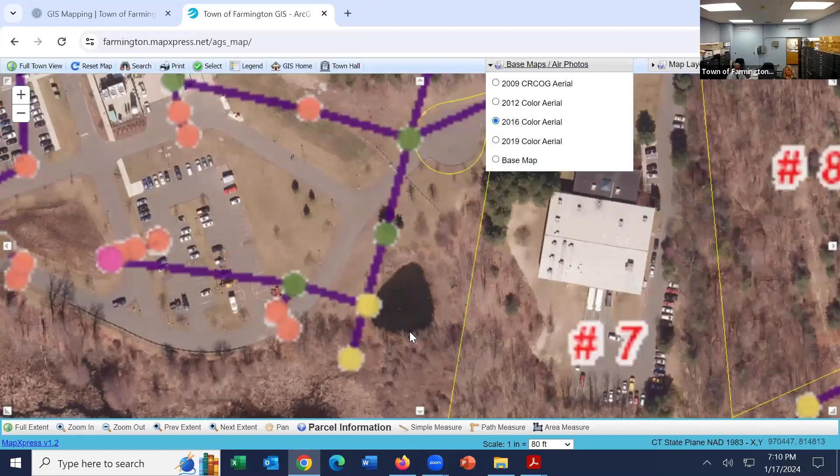So here's an example. This was 2015, and this is 2023. And then I actually got another video. This is from 2016, our aerial mapping we have from 2016, and you can see how wide open it was when it was first originally built.

Unfortunately it's gotten to a point now where it is pretty well vegetated over. So I've got some photos here as well. You can see in here there's a lot of debris down along the edge, right along here, all the way around. There's the pipe inlet coming in.

Now we have had a lot of water, as you know, a lot of rain and runoff. However, you can see there is an area of heavy silt, I think, at the bottom of this pond. So I think what's needed is

they're going to need to clear out a lot of this invasive vegetation along the slope so they can get in there, clean around these openings. And then, again, they're not going to do it right now, but when this water is down, go in there and excavate a lot of this sediment out and haul it off site.

At one point it looks like this was designed as a retention basin. I think it was assumed that with all of the sand on this site, this water would infiltrate pretty easily. So we're thinking that either one, the groundwater has snuck up here, or two, that this sediment is acting as an impermeable liner where the water will not infiltrate out.

As part of that, right over here there's a spillway, and with all this heavy rain, with all this water that's ponding in here, the volume has been reduced and it spilled over and eroded the outlet of the spillway a little bit, right around here. So what they want to do is just put some new riprap stone and repair that.

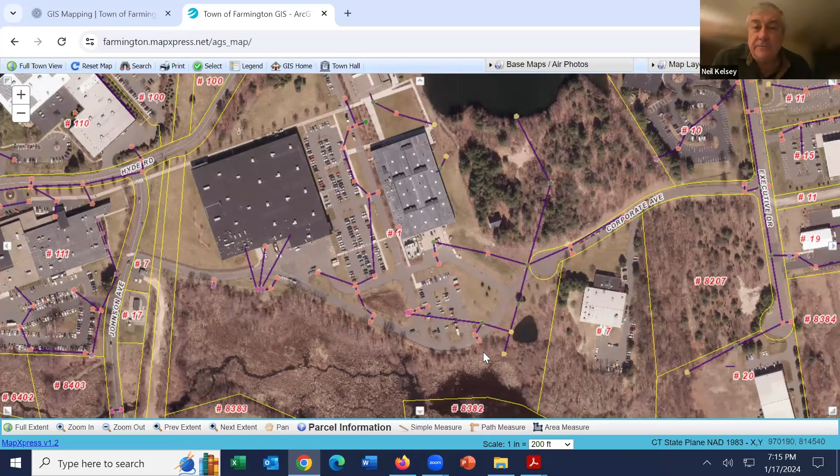Does anyone else have any questions? The only question is from Mark Simpson. When do they, I know you said in your Friday notes that we should do this in the driest part of the year. Did they give you any indication that they have a specific time to do this or not?

No, as we had talked, we had met right before Christmas time. We got together with them and said, yeah, all right, the rain is done, right? We're gonna slow down now. So of course we had the snow and then we had 3 inches of rain with 3 inches of snow melt, so we're back up to where we were before. We're just gonna work together and let them know when a good time is to get in there. If it actually dries up a little bit next month when it's cold, they may want to go in there and try to work on it when it's a little more firm, rather than wait until late spring when it's all wet and they're trying to lose the machines in there. So it's gonna be a play it by ear situation.

That's what I was alluding to, I was wondering just like what we had the other day, how much people had flooding, at least in my neighborhood. I heard about a lot of flooding in the Millwood section, and if they would have the same scenario towards late spring, if there's snow pack and then there's rain, what type of problems would it be? So I didn't know if there was something you'd want to do sooner versus later. I'm not saying one or the other, but it's all about getting the job done and done right.

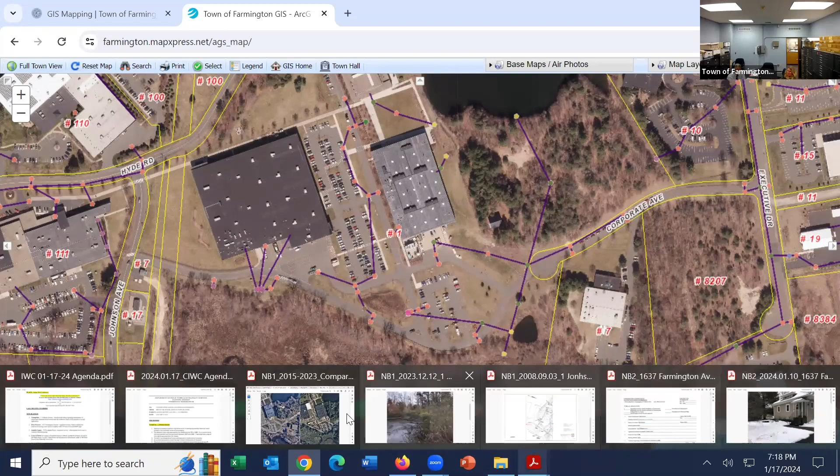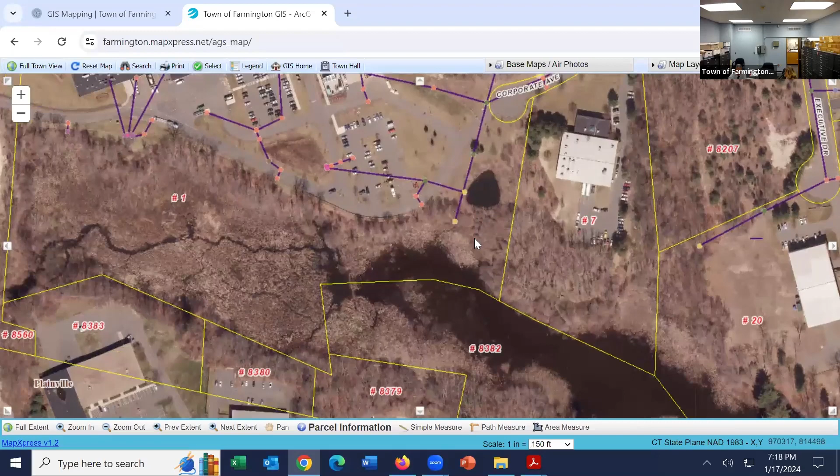When I came back I took my pictures, but the picture for the spillway didn't come through. It's just a little riprap spillway - it goes up and spills over down the edge. When you come into here, it flows directly into the Pequabuck down in here, comes down through here, meanders in and flows out, then takes the turn and heads right up underneath Route 6 that way.

So I take it that in doing the maintenance, there wouldn't be any discharge from the pond. No, there would be no discharge. The only thing we'd have to work with them on is whether at some point we need to pump the water down and get it out of the pond. If it's not going to infiltrate, then it's never going to infiltrate. Then I'd work with them, making sure it's clean, and we just pump it out over the edge down the spillway, and address it. Then let whatever amount of water's left dry up, and then go in there and start to excavate it.

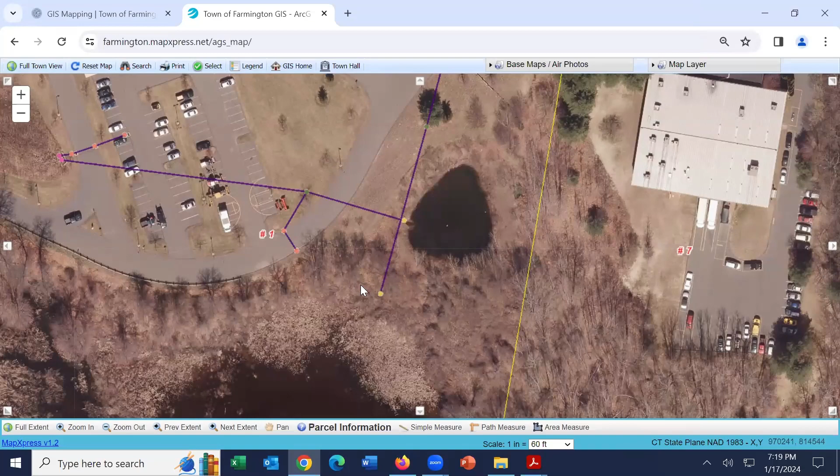Okay, this is Dave. I did have a question too about the stormwater system in general. It seems the inlet from this pond is connected to the outlet to this other pond over to the north. This one, yes, it's connected right here.

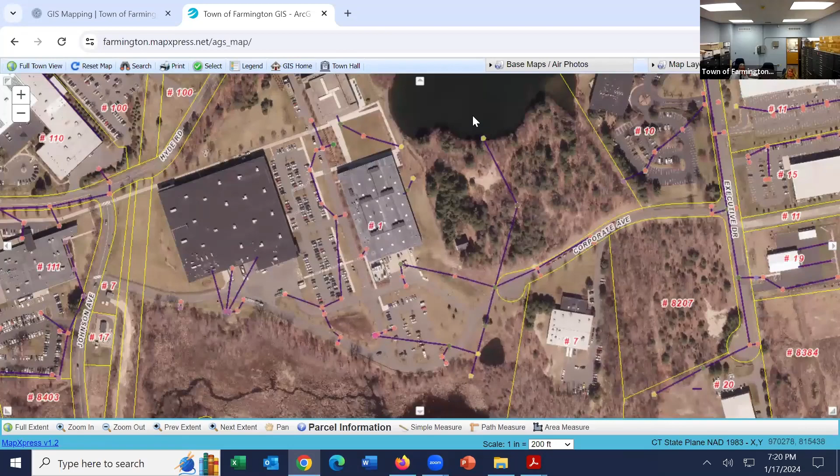What happens is some of the site, you've got different outlets throughout here. So this portion runs out here - the parking lot - and this portion comes in, runs into the pond, and then flows out this way and goes underneath. This is a large outlet from the existing pond on the property, so this water flows this way right out. And what happens is that bypasses the detention pond we're talking about - yes, that does. Then this pipe comes in, sneaks underneath that pipe, or over it, and then just pops right into the pond.

Okay, I just wanted to get clear where things are going. Thank you.

Okay, does anybody have any additional questions or thoughts about how you'd like to handle this?

This is Dave. It does seem like it's almost the definition of maintenance. This is Mark, I agree with that statement. Yeah, this is Rich, I agree too that it lends itself to the maintenance definition. Yeah, this is Neil, I agree.

I'd also maybe suggest to them that they come up with a routine maintenance plan. I don't know what that would look like or how often it should be done, but just to prevent a major clearing or cleaning at some point down the road. And just so everyone knows, that's going to be under section 4.A of the regulations.

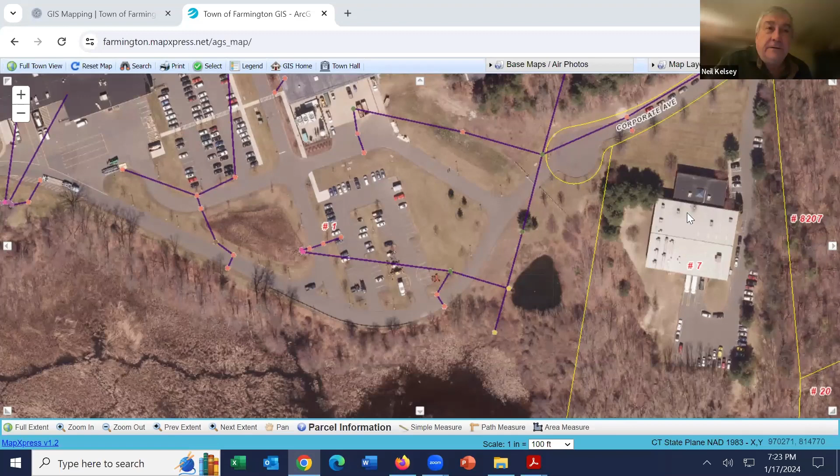Yeah, use this as a rationale to get them to do something similar as if it was a new application. Exactly, get them on the same page. I'll definitely discuss that with them, they need to look.

So would somebody like to make a motion that we would handle this under section 4A as a maintenance activity? Dave will make that motion, and Mark will second.

I would say let the town have the flexibility to determine when this work is being done, if there's an optimal time, say as Bruce is saying, like February, then that's fine. Otherwise it's another time of year that's more beneficial. So I would have the town staff make that determination with the client. And I would suggest that any applicable sedimentation and erosion controls that might be needed would be used.

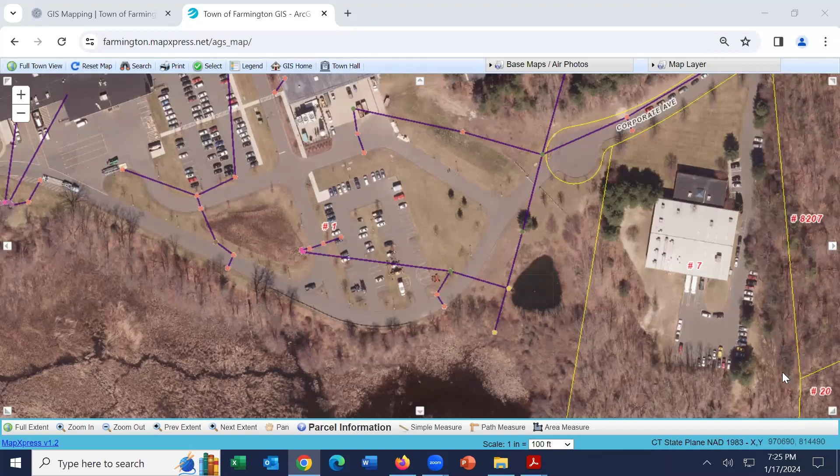Just to get into pumping that thing out. Exactly, okay. Sounds like a plan. All those in favor? Aye, aye. All those opposed? Abstentions? I guess we're good. All right, thank you.

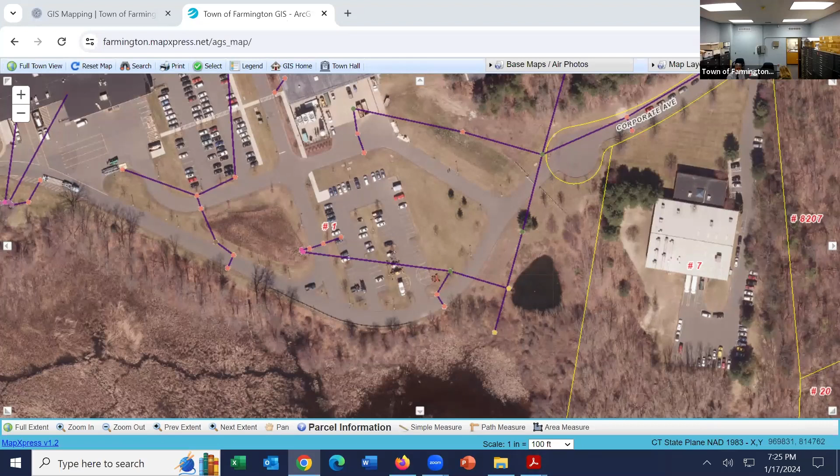Second application is for 1637 Farmington Avenue. Owner is Peter Petrossi. He also has his contractor on board. So let me just do a couple things here, let me switch over to that application, and we could then bring Peter in.

Are you on, Peter? Yes, can you hear me? Yeah, we can hear you. Okay, so I'll start with this little plan view here. If you want to give a quick brief summation of what's going on for the commission, start with your name and we'll go from there.

Peter Petrossi, I'm the owner of 1637 Farmington Avenue. The house was built in 1934. There were no public records until 1948. I did check some deeds that I'm pursuing with my legal team regarding the estate.

Bruce and I can't think of the engineer now, but they were very helpful. Kathy Blonsky wrote a real nice email on my behalf to the state of Connecticut, looking for assistance from them. But bottom line, what I have on my property is a sinkhole, and the sinkhole was directly caused by the culvert, with the excessive rain and probably a number of other factors.

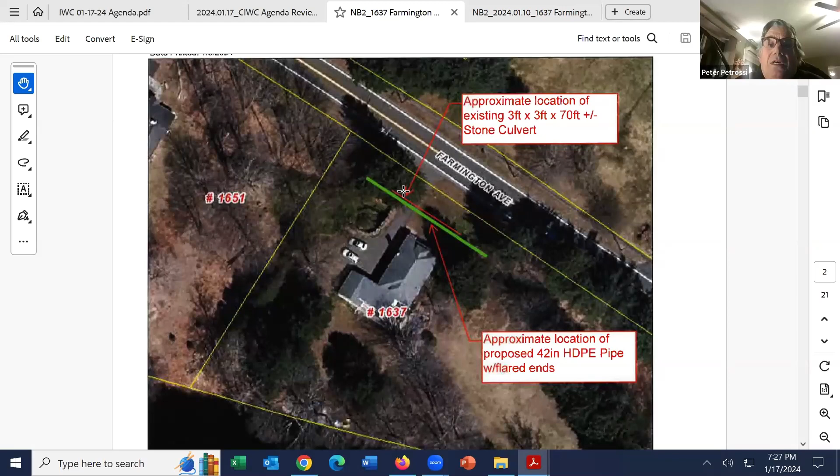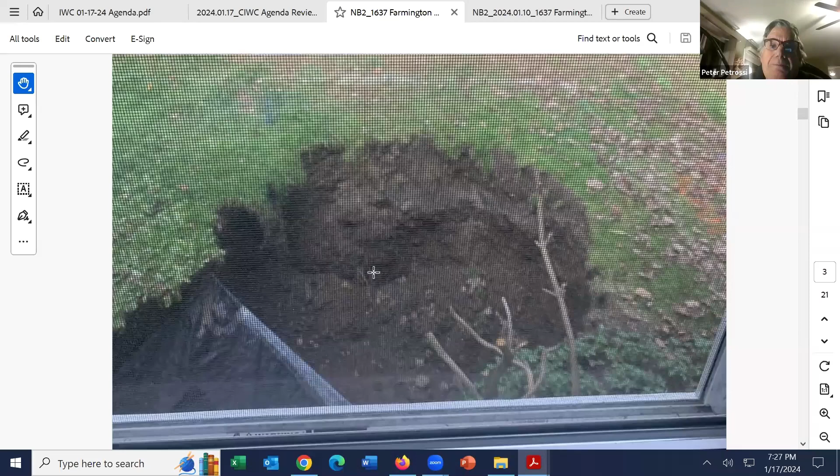So I got estimates, a number of estimates just to fix a small portion of it, because it's a drainage problem. And after further review, I don't think I could sell this property with a Band-Aid approach.

So what I did is I had contract... can everybody hear me okay? No, we can hear you. Yeah. Emerald, okay, if you could... yes, I can hear you too.

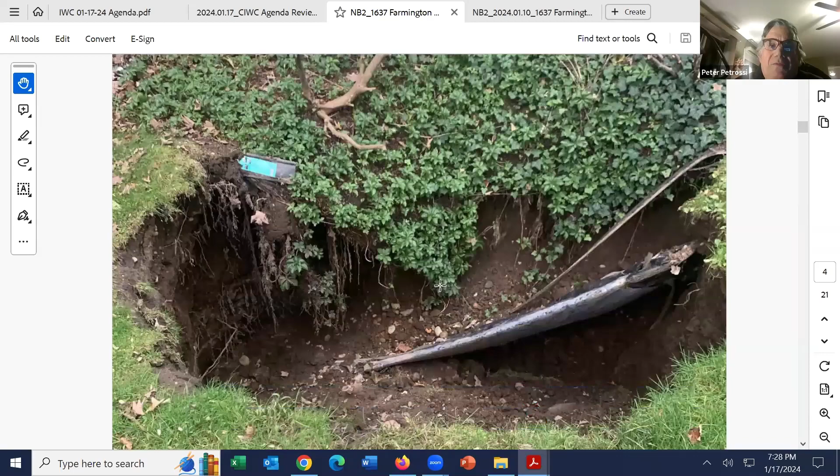So I got a really good group of contractors. I settled with Emerald's group there, and I'm trying to get the sinkhole... I'm looking to repair the culvert from one end to the other and do it right. It's a bit, cost is insurmountable, but I'm looking to do it with double walled ADS pipe, which is what

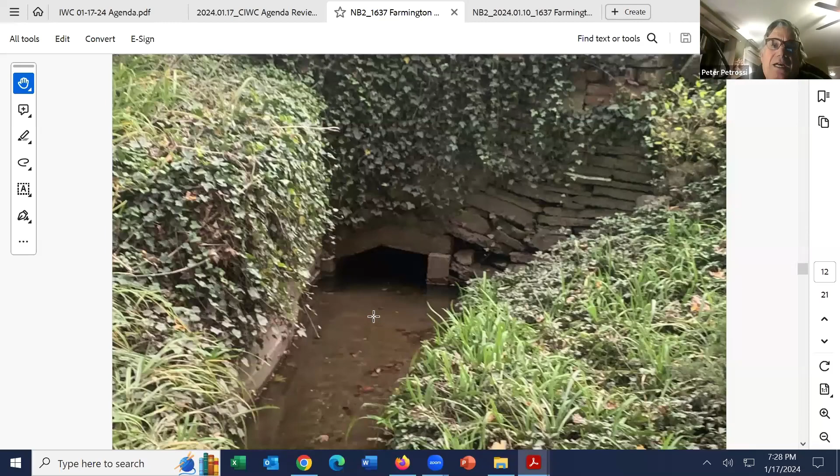all of the contractors that bid it recommended, and the proper backfill, stone compaction. They're going to extend out on both the inlet and outlet and flare down, flared ends I believe is the term. I did a lot of research to educate myself on this, and they really didn't start making culvert pipes till 1987 that are available for this type of application.

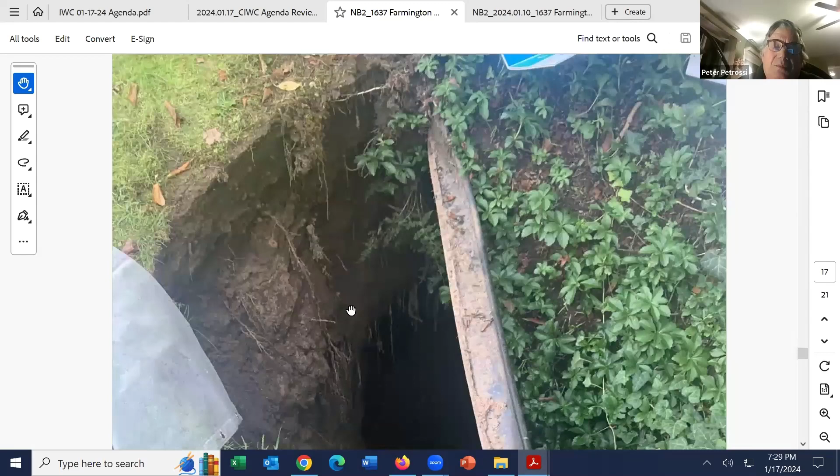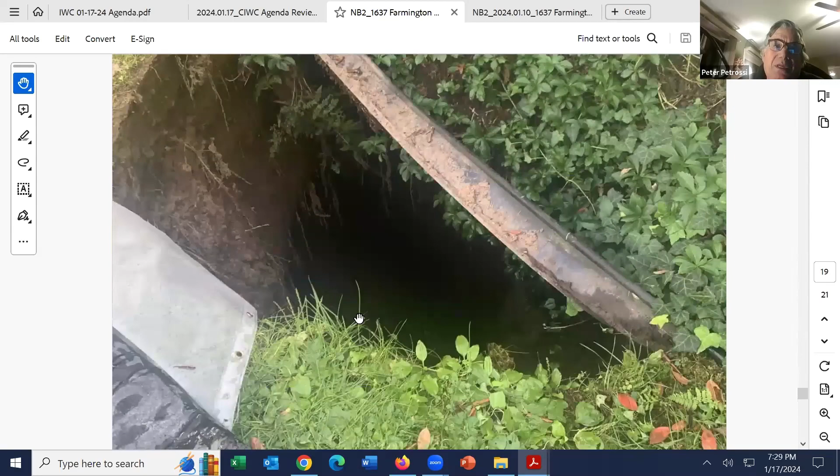So I'm using the best practices. It's very expensive, I still do have issues with the state and I do have legal counsel on that matter. But my approach to this is to do it right. And I got to be honest, I feel like I could almost write a white paper, I put so much time into researching this. With the help of really good contractors, I got a lot of sympathy from people because I'm 68 and I was going to retire. I can't retire now.

So this was some pictures I was trying to scroll through, if you were still seeing any of those of the sinkhole. And more of the sinkhole. This is the actual driveway crossing, and the culvert runs across this way through here. You can see the condition of the culvert inside. It's just all loose stone. It's damage, yeah.

So if I go back to the plan... it's gonna hold on, I gotta get out of this. This is crazy, it's a new... it's not working here, I gotta go. And here we go.

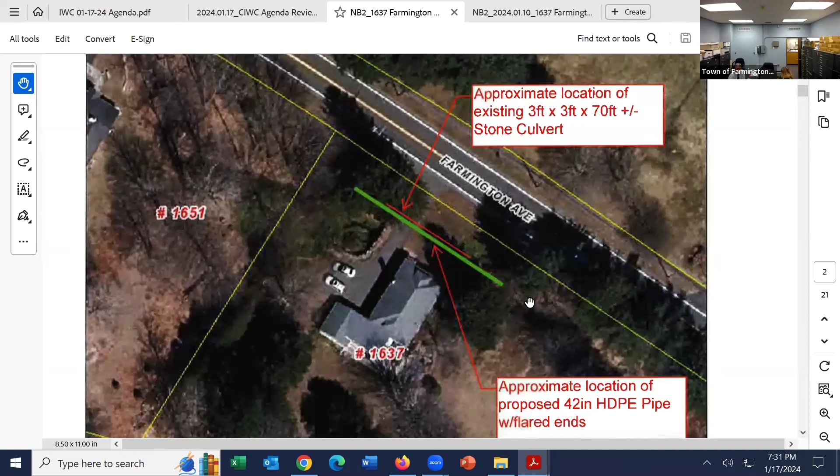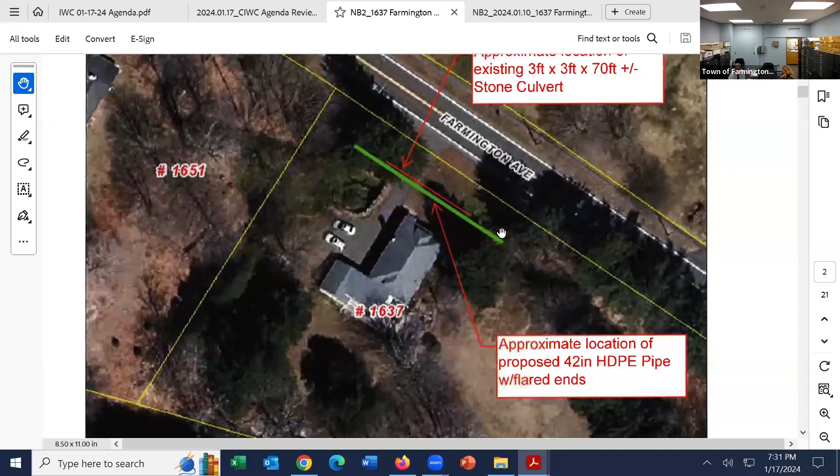So we have a little plan in here. Here's Farmington Avenue, there's the driveway crossing. The red is the existing culvert. And as you remember, there were some head walls in there. So part of the plan, he's proposing to put a new 42-inch pipe across here, and the head walls will go away. Instead of where the head walls end here and here, they're going to now fill and slope the ground down into here, and put flared ends on either side.

I'd like to just make one comment. In my research, when this was built in 1934, there were probably no or very little homes in the area. Since then, across the street, those condos, I walked across the street, they've got a large 4-inch and 2-inch drainage going into the stream. A lot of houses were built, and the state catch basins go about a half a mile up the road to Walnut Court. So there's a lot of water coming from the state side and the neighbors. I'm not happy about it, but it is what it is.

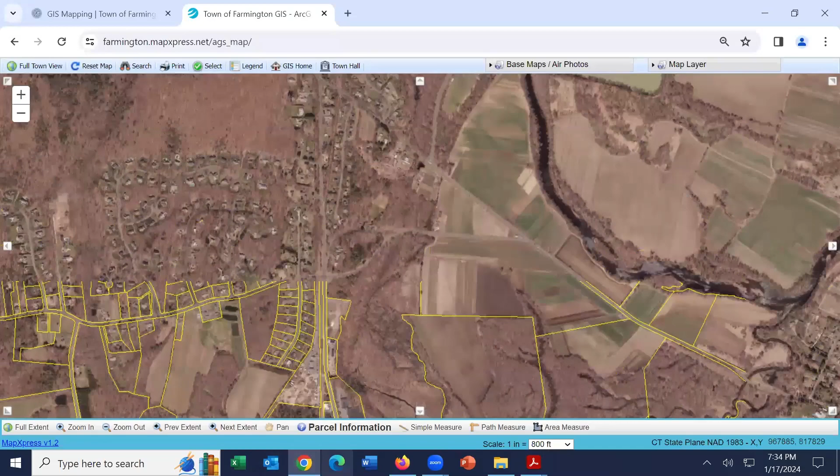I did have a couple of questions. What is the nature of this water course? Is it intermittent, or does it flow pretty much all year long, or is it more tied to storm events? He's asking how often do you have water flowing through there?

It's really a light stream, you could walk up to your ankles in it. Even today, once you get on the outlet side, as it approaches the river, it gets a little deeper. And the reason it backs up, what I've noticed, I've lived here 7 years and I've never had it overflow, even with the heavy rains that we had, where it really came over. Where it comes over is the southern part of the property down near the river. But when the river gets excessively high, it takes a little longer for this water, in my opinion, to migrate out.

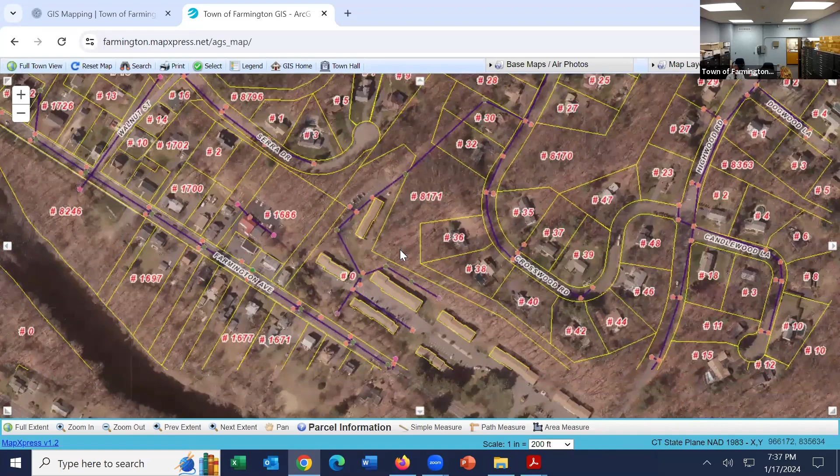You can see this here. Here's the outlet where it comes into the Farmington River. Following it back, here's the culvert crossing, runs up through here. It takes a lot from at least Walnut Court down, dumps into there. Also takes the back of these homes along Farmington Avenue, comes into here. The apartments across the street dump into there too, which also collects water from Crosswood, so road runoff, as well as the entire yards, all pitched down through here. So there is quite a decent size drainage area.

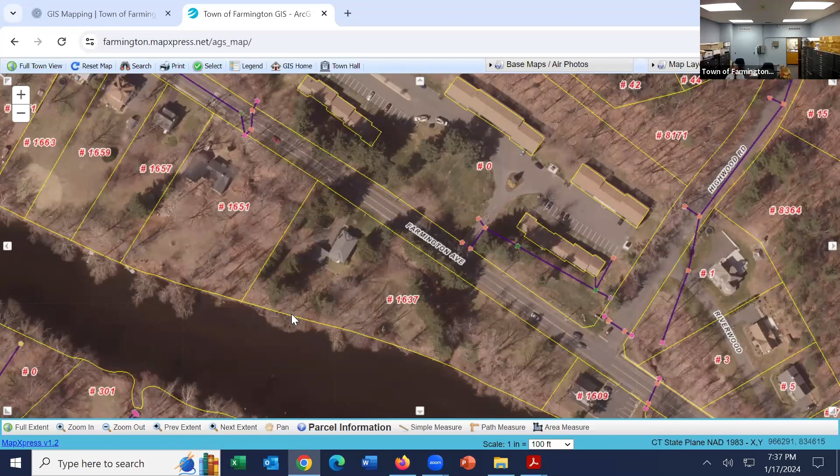So this is pretty much a watercourse for all practical purposes. As Peter said, it's usually... does it ever dry out, Peter? It did, you know, a few years ago when the river was very low and we didn't get any rain. The water was so low it didn't have to move, it just kind of sat, maybe a half an inch or so. Even today it's very low, like that picture Bert showed, it went back to low even with the snow melt, which surprised me.

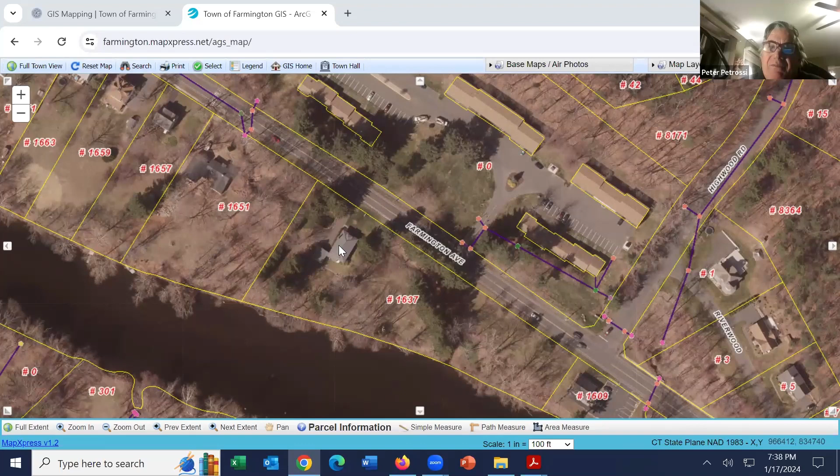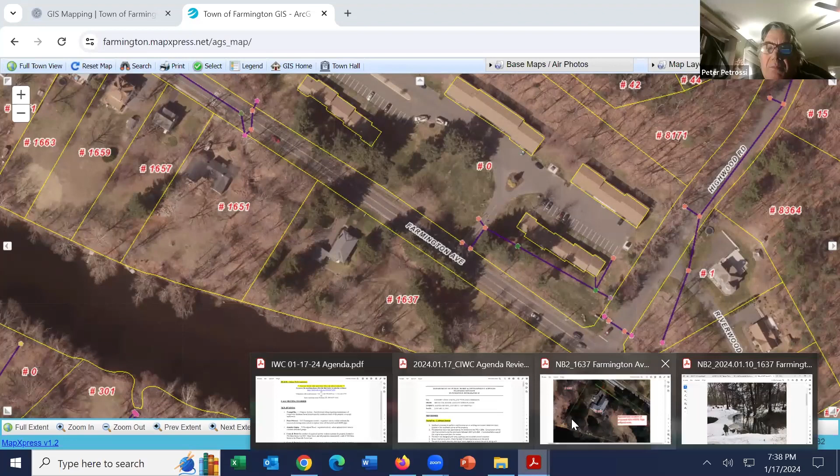And again, I'm using best practices. I am not band-aiding this. I don't even want to mention the cost, but I'll be honest, the high estimate came in at 160,000. For a homeowner to absorb this, at my age, and having the state water here and stuff, I have a lot of questions I'm still pursuing with my legal people. But the town has been extremely cooperative and helpful. I feel blessed to have their support, going to bat for me with my dilemma.

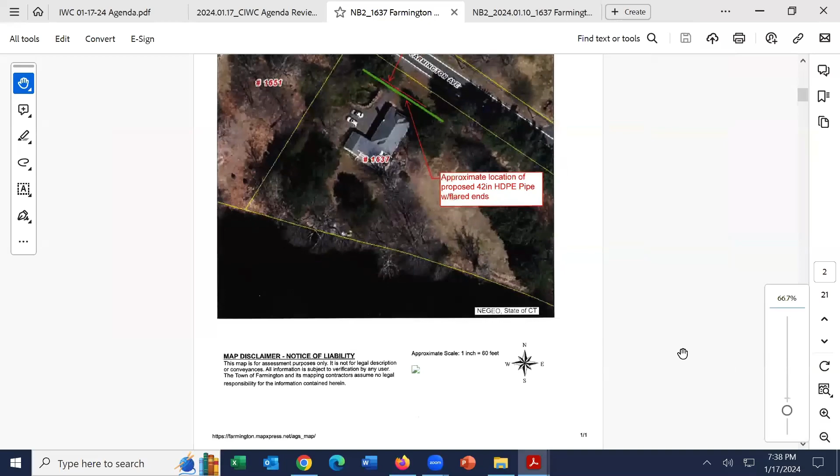I might have a second question. I just wanted to clarify the reason why we're not going with the end walls and extending the pipe, I guess 25 feet in each direction. What was the rationale for that?

Well, the rationale on the extension - and I'll let Emerald comment after - is I had several people bid this, one of them did the project on West Avon Road. Everybody said, based on their experience, to extend it out and slope down with the correct compaction. We're going to go right by ADS, which is the best pipe you can get - I looked into Prinsco, ADS is better. We're installing it with the right bedding, everything. So we are extending it instead of just keeping the end wall inlet and outlet as is. It's going to extend out, somewhere in the area of 120 feet plus or minus.

If you want my contractor to chime in - Emerald, go ahead. If we're gonna extend it like 25 feet, like I mentioned, that slope needs to hold for your driveway and for the holes, it's already there, so we don't have to do it again. And it's gonna be the right materials for compacting, like you said earlier.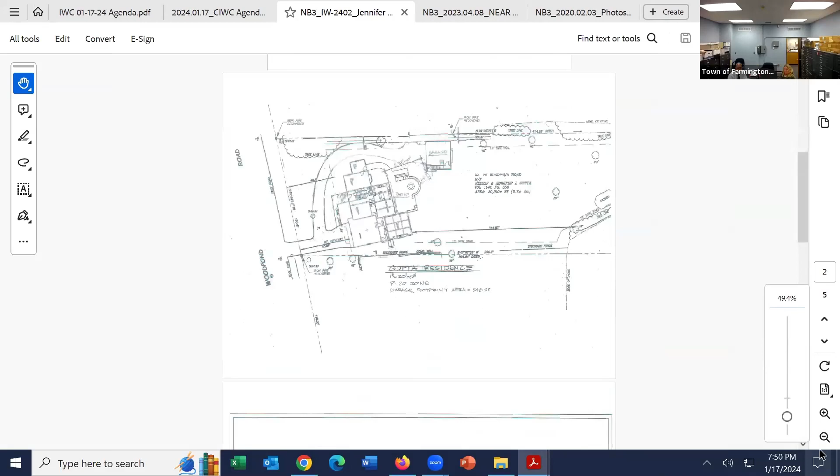All right, Jennifer, if you want, I'll zoom in here. If you want to give the commission a little bit of discussion of what's going on, and I'll kind of point and follow around the plan.

Well sure, all right. Hi, my name is Jennifer Gupta, I live at 70 Woodpond Road. We put in an application for an accessory structure in the rear of the home for a garage. We built the house, kind of an addition, we kept the original home when we purchased it back in 2017. And so we kind of worked with the angle of the existing home, and we really weren't able to put in a garage sizable enough, not only for the home and the size of the home and the amount of bedrooms, but just for us. So the solution is the garage in the rear of the yard by the town ordinance.

We worked with Kemper, who designed the home, and he did the garage as well, keeping with all town ordinances and setbacks. The main issue, which pretty much everyone on the lake has, is obviously our proximity to any waterway. Most homes are themselves within the waterway, but by design that's what happens when you live on a lake. So we put in the application, the plans are there, saying that we would need to have also a driveway to go back to that garage, being that it isn't behind the home.

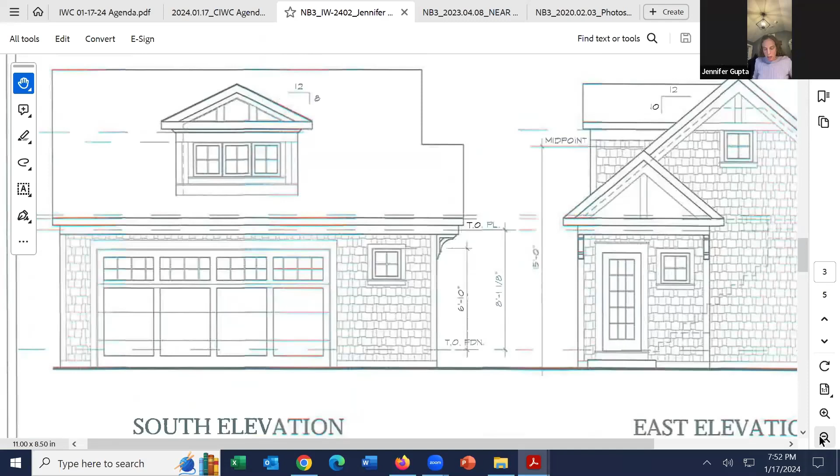And just to give the commission a little bit, how big is the garage? The garage is, oh gosh, sorry, I'm trying to pull up my thing. I believe it's 24 by 22 - those are the outer dimensions. And then it's going to be a two-car garage-ish with a pool house upstairs on the second floor.

Yeah, so keeping with our design of the house, we have a lot of dormers, so I really like what Kemper did. He made it seem really seamless and part of our home and the design. That just gave us the ability to have standing room in the A-frame sections, and then that way we can utilize it for storage. Being on the lake, we have a lot of recreational things, so the storage would be great. Obviously a garage is needed with so many of us.

And the pool house, again with the lake, it's recommended best practice to wash before and after you enter the lake. So we do have a water feature in the pool house so that we can change and store and come in and out of the lake.

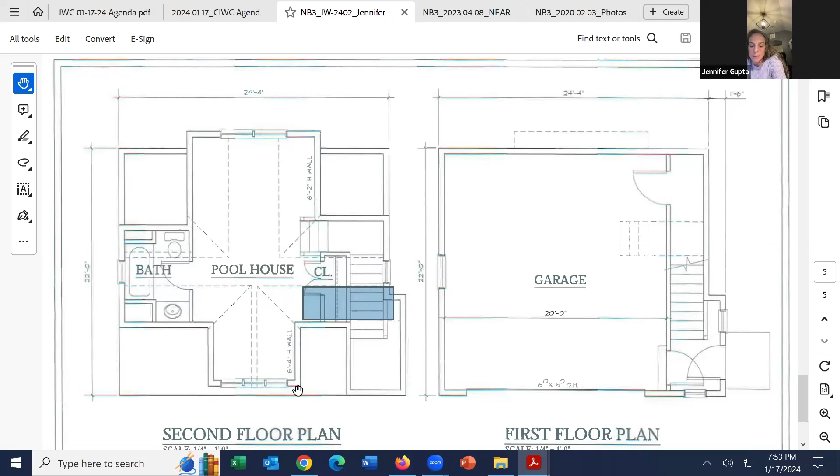Come back to the plan. So here's the architecturals of the plan, if anyone's interested in those.

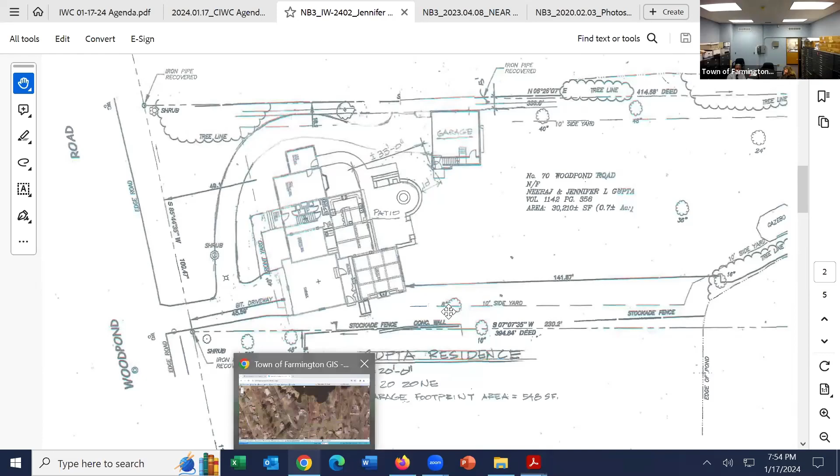I'll zoom in, let me go to the aerial. So here's the house, here's the existing driveway. Let me go to a newer photo. This one was under construction. You can see this is where the house used to be, the original house with the garage. They had since come in, added the back, and redid the garage here. So the driveway will share this existing driveway, come around here, around to the back to a garage here.

In the back you can see where the pond or the lake is, I'll zoom out a little. There's also a drainage swale that takes quite a bit of drainage area, a little from the road but mainly from as far back as Yorkshire, through this swale, down through this area, under a little pipe crossing, back out into an open swale, then flows right into the pond. We got some photos that may be of help.

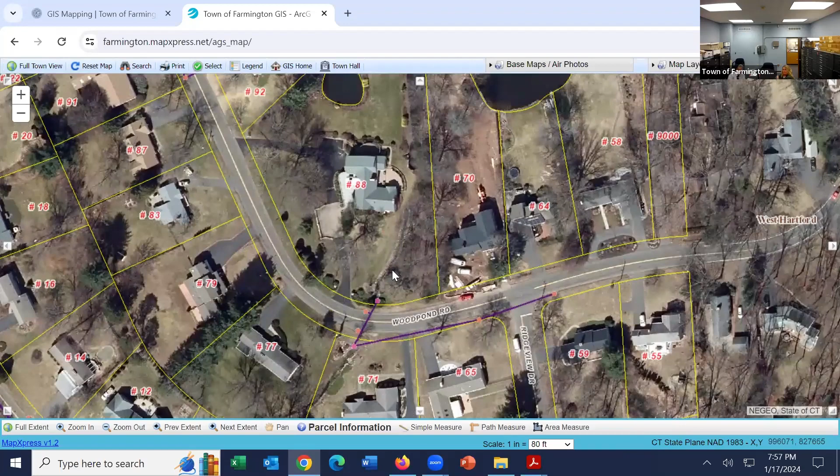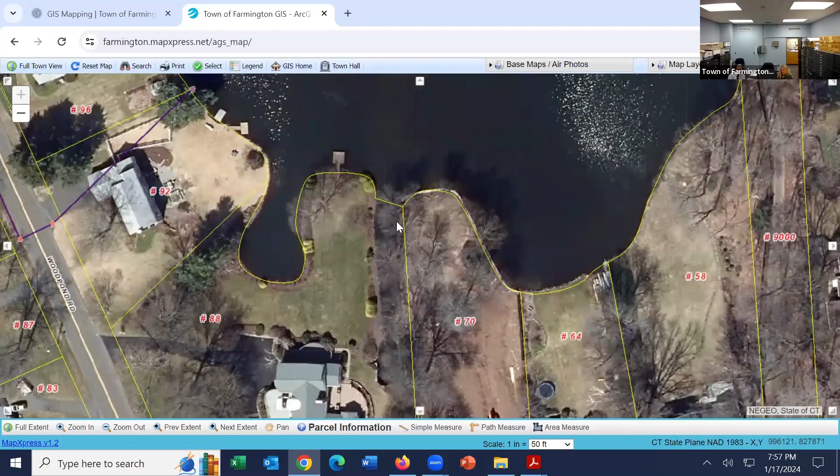So as I was saying, when you go back into the maps here, that drainage swale actually comes back, believe it or not we've walked it, from the middle road, Valley View area, underneath 84, back under 84, underneath the stacks, comes out through Blue Ridge, Shady, comes out and goes right to the pond. So there's a combination of some open channel here, you can see an old stone swale. It's then piped under here, back out to an open plunge pool area, then a defined channel with some stone all the way out into the lake.

So we did receive, and I have that here as well for the commission, a letter from the association where they have approved it. So they approved the detached garage subject to the above mentioned property. The Woodridge Association has approved this request with knowledge that approximately 1,000 square feet of additional footprint and thus impervious area shall be added to the property. The drainage plans were presented at an earlier date in 2017, I think that's when she did the addition on the house. Those plans are still in effect and should be followed. The property is contiguous to Colt Brook, which is what I was explaining, that area that drains out to the lake, and one of the two main streams feeding Woodridge Lake.

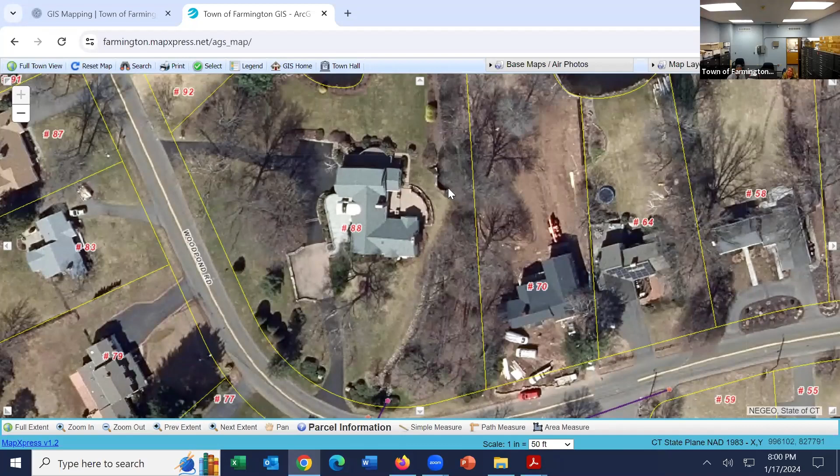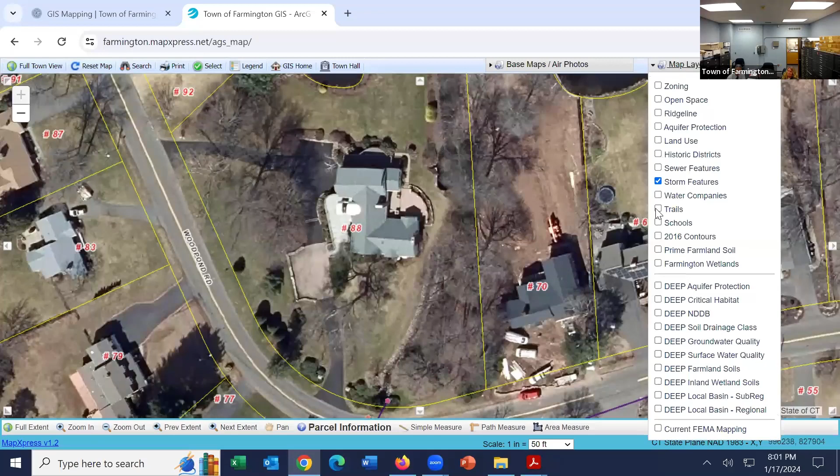So there's that tree, and the garage will be somewhere right around here. Everything pitches off to the side at most. Turn off the view here so we can see the contours. Everything pitches this way, towards the backyard as well as to the side here.

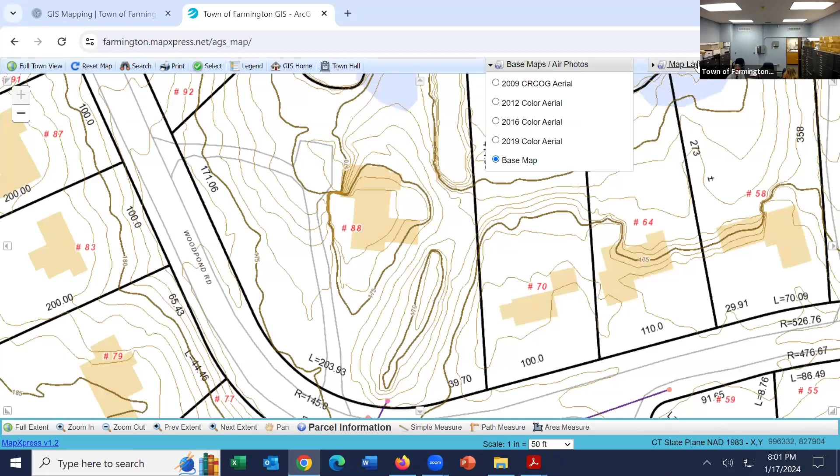Were you referring to the plan, the site plan where it says iron pipe recovered? Yeah, that's a property marker. Exactly. But it just so happens it is in that same area where I think it's piped.

It seems to be pointing towards the bottom. Yeah, it is that area that it goes underground, but it's a much further distance away into the neighbor's yard. Oh, okay.

This is Rich. The plans we've seen don't show any silt fence or sediment control, erosion sediment control. So speaking for myself, I'd like to see, even if it was just this plan, but marked up where you would be planning to put some erosion controls. That would be helpful.

Yes, there is a stockade fence that was pre-existing, and it's easy. We can line the hay bales all along the base, and that pretty much runs all the way back to the tree line.

Based on this map, I think we're looking to put the garage about 5 feet off the property line. Is that what you're looking to do? Yes.

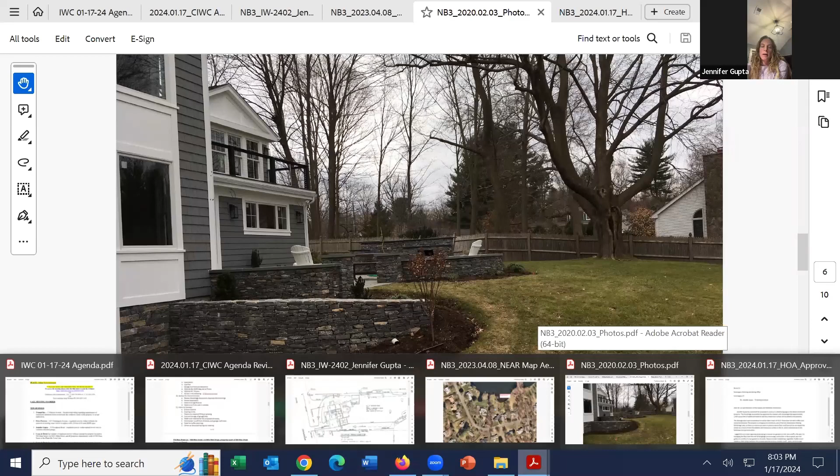And then even just how he created the driveway with a little bit of a curve so that we can then do more plantings. The association had wanted to kind of pitch things so that it doesn't all kind of sheet off in one spot, and that way we're able to better control the flow from the impervious surfaces.

Is it your intent to have a paved driveway to the new garage, or would that be some kind of pervious surface? It would be paved, lined with buffers that they had requested in place, like plantings, and again the pitch of this.

Okay, yeah, we don't have any information in terms of where this water is going to go because it's pretty flat in here, but as it takes off, it comes around here. Is it going to pitch this way? Are we going to pitch it this way? That's why I had some questions in my report with regards to a little more detail on that. Would probably go a long way.

Yeah, I know the plan is to completely landscape that whole area to absorb and take the water. Granted, we don't have control of what the neighbor does in the future, but that whole area on the other side of the fence is just all a nice wooded area with great trees and a lot of different plantings. So there is a lot of vegetation in place already, and we will be adding to it.

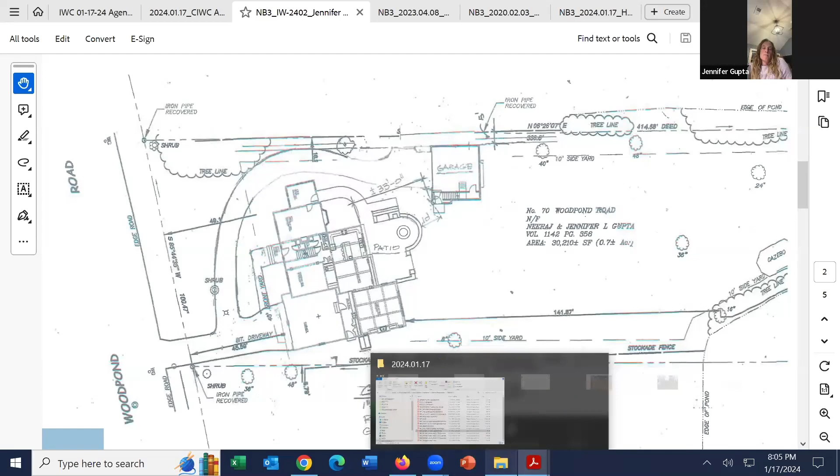Are you going to adopt this recommendation regarding the roof runoff being infiltrated? Yeah, so again, just like our house, we have all the gutters and downspouts, and then they lead into areas of vegetation that are specific for water absorption. That's just a part of the landscape design in the house, to be able to collect the water in one area and deal with it that way. Very good, thank you.

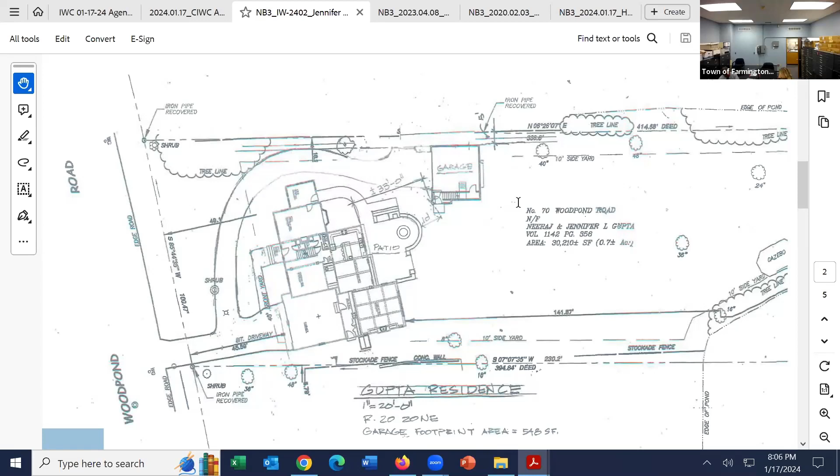Just to interrupt on that one as well, Dave, but as part of the building permit, we're going to want to see more detail on this. We'll want to see some spot elevations or grading on where this water is going to go, and where these rain gardens are going to go, making sure they're sized appropriately for the runoff. At some point, we'll need to get an engineer in there to give us a site plan, so it's either going to be now or at the building permit.

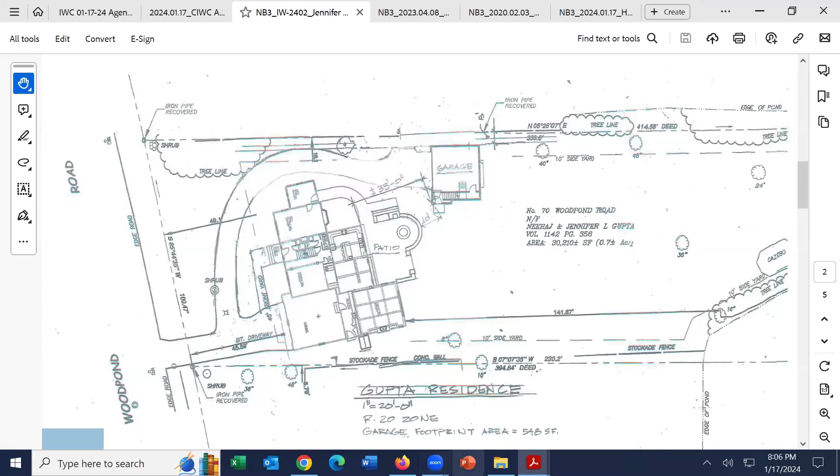Any more questions from anyone? If not, can I get a motion to accept the application? So moved by Dave. A second? Second by Mark. Okay, we have a motion to accept the application. All those in favor, please signify. Aye. Opposed? Abstentions? Okay, thank you.

Chair, just to bring you back in, Robert Eisner has now called in, he is online. And then I have my notes here. If you guys want to do a site walk, if not, determine significance or how we want to proceed from here.

My thought would be to do a site walk and defer significance until after that. I don't know how the other commissioners feel about that. Yeah, I would favor a site walk, and I think if we're going to do that, we can wait until after the site walk for significance. My initial reaction is it's largely maintenance within a residential property, but still good to do a site walk. Okay, agree with that.

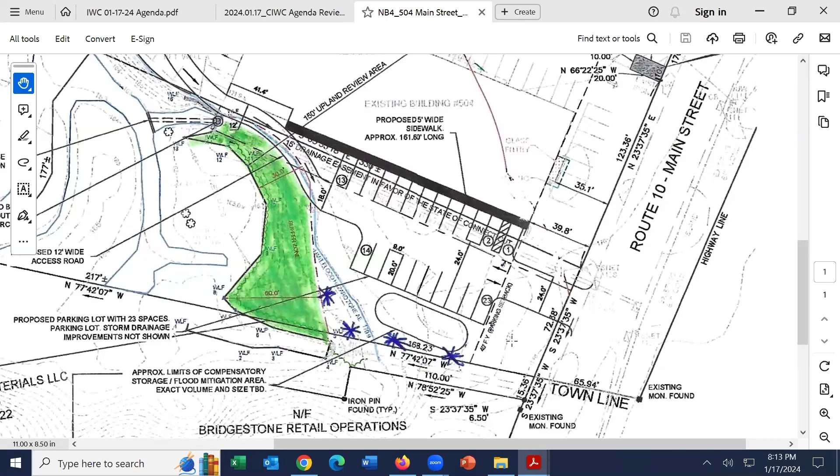Thanks, Bruce. Okay, I guess does the commissioners have any questions? The question that comes to the top of my mind was the trees that are shown there. Are they evergreens or deciduous, or what did you have in mind there?

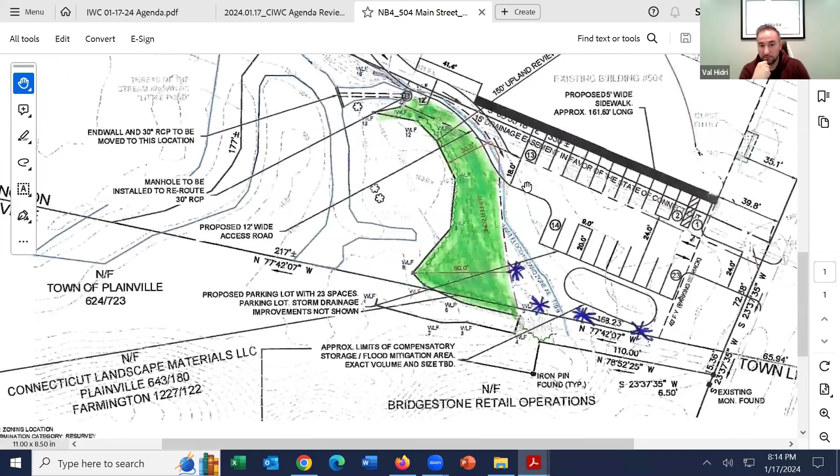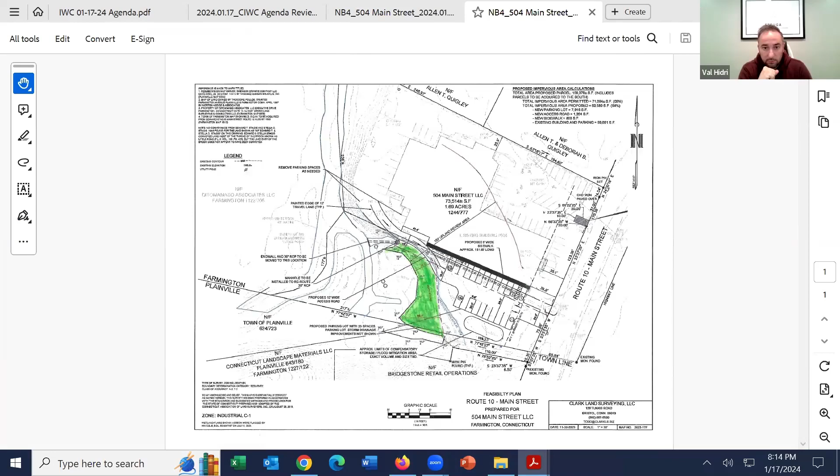I have a second page. I don't know if you recall, Ian, the wetland scientist. I'm not sure. I know I sent it to you, Bruce. Is there a second page there? Not on this one, I think it's on the other one. Hold on one second, I think it shows... he sent me this on a second one, but I only have the one on this one.

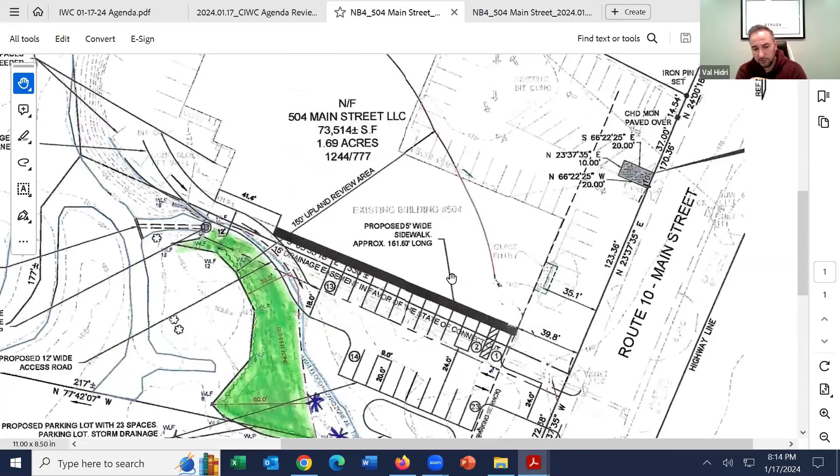Well, the trees alongside that are marked with pen, that was more for decorative trees for the buffer zone for the parking lot. That was mainly for future approval for the parking lot to be in place. The actual buffer zone plantings, I think that was originally with Ian. I couldn't say, I don't see it in front of me. I think I added another 40 or 30 plantings for that buffer zone, almost doubling it. I know it was less than double, so I don't want to say double.

For some reason, Val, I'm only getting the first page on these. I'm not sure why, but I'm trying to find the last one that we had. I do have it, but I don't think... yeah, give me a second.

I also like to say I'm sorry for everybody's loss. I heard earlier. My condolences to everyone.

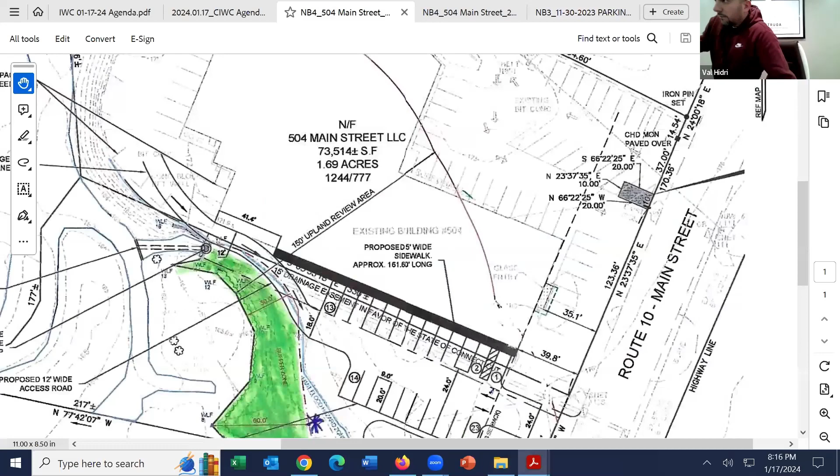It's never good news. Not on this one. There was another report, when was it here? 504, here we go. I think that might be... I see something, Snowberry. No, you're not Snowberry. Down here at Apple Tree, Mountain Spring. It should be next to that other one. I sent it to you back to back. No, but it's not coming. I saved them straight to this folder, and there's only one folder, only one page. I'm not sure why, I'm only getting one page, but yeah, this one page for some reason.

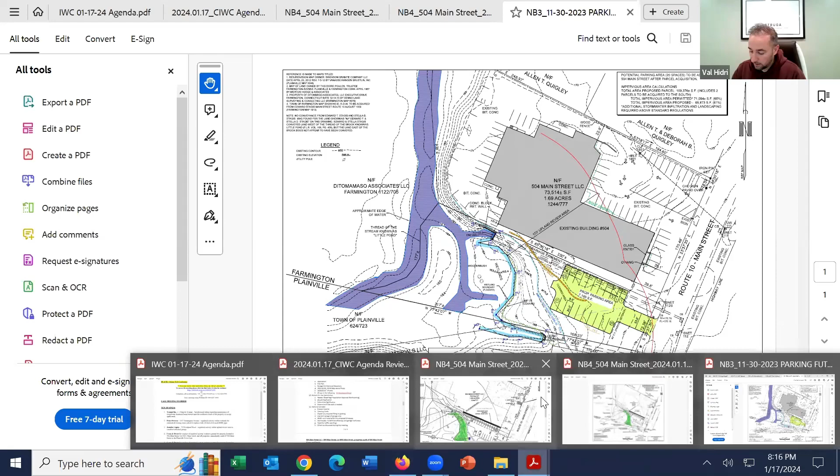But it was pretty much, I have one here. It's a type of plantings. Twice it's Snowberry, Serviceberry, Shadblow Serviceberry, there'll be 8. Black Chokeberry, there'll be 15. Gray Dogwood, 35. Northern Bush Honeysuckle, there'll be 15, and then the 4 decorative trees will go across on the other side. But that will be in the green shaded area, is what I just read. What are these trees again?

Well, we haven't decided, I haven't decided. I was going to go over with you something decorative. I'm not sure what the name is - they're usually with the white bark, the colorful, maybe pink or purple, the pinkish. Birch? Yeah, some kind of birch. I was thinking of something of that nature. Not sure exactly, maybe I'll go over it with you.

Keep in mind for the commission, as part of this parking plan, they're going to need to do a buffer planting as well to meet the zoning regulations. So whatever decorative trees go here, there could be more trees requested along this area as well as part of the parking area. However, we're fighting two things with the fill in the floodway, or not the floodway, but in the 100-year. So they made some compensation up here. You really don't put the compensation outside the floodway - we should put it inside the floodway. So they maybe need to do something in this area here. Just some thoughts.

Engineer - I'll definitely put that in his ear. I wasn't aware, I don't know. But, yeah, basically this is what I've got. If there's any questions on behalf of the commission.

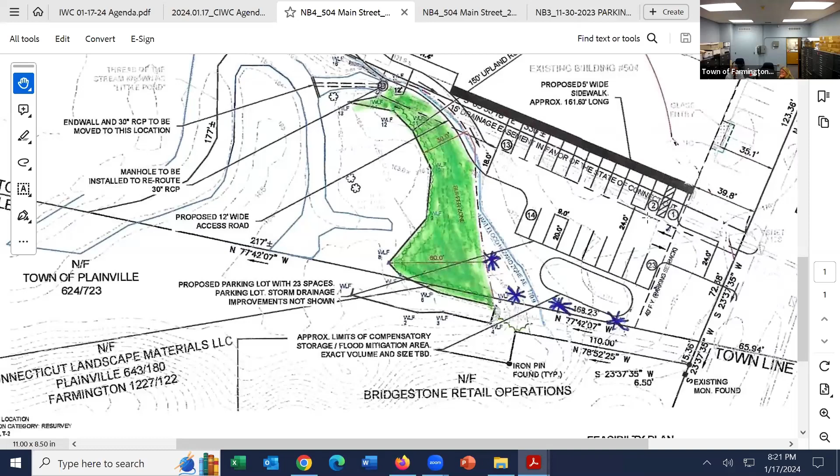So this is all disturbed up to this point here, and there's a line of hay bales across through here as well, because this is the area where they're doing an all new electrical system and boxes for the whole building. So a lot of this area is being used for staging as they bring all the electrical lines up and around into here.

Bruce, what do we need to do at this point? Well, again, I think opening this up for a full line of questions for the commission, but based on my review and comments, I think what we need to do is decide if this plan is adequate - do we go with it as is? Does the commission want to make any comments? Once that is complete, once we have the plan complete, we can vote on it. And then we could look at the timing for installation of the restoration plan, and then maybe doing a maintenance review as we typically do for these areas, like every 3 years.

Okay, I can bring that up so you can kind of see where I'm going with that. You don't have it on your desk with you.

Right here. So, review limits of disturbance in any wetlands, 150-foot upland review, development approval of the restoration plan, approval of restoration plan from the property owner, timing for installation of the restoration plan, and maintenance and review of plantings for a 3-year period, and anything else discussed during the meeting.

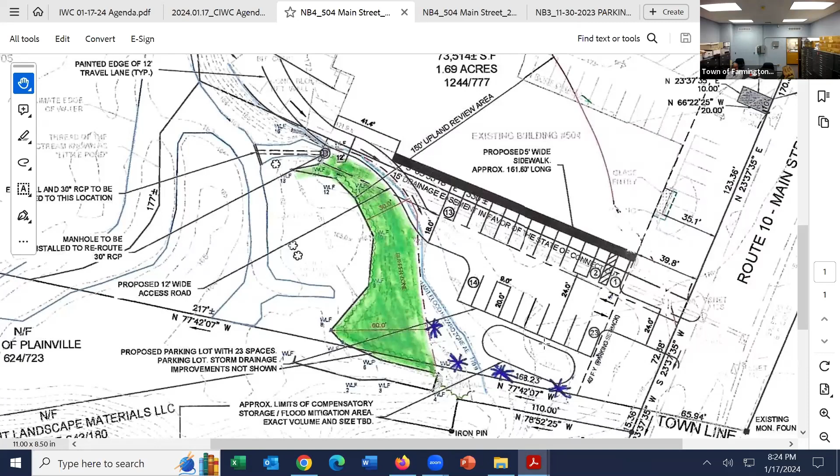So at this point, the commission can decide: are these enough for what we need? Loam and seed the whole area and leave it for the future parking area, or what do you know what I mean? That's kind of where I'm looking for a little help with this as well, I think.

I'd like to remind the commission, I did double the buffer zone there. I've almost doubled the amount of plantings in the whole entire area.

Also, as the soil scientist stated, there was no damage done to the wetlands. There were no issues there during the test pit tests that were done. There's no disturbance of any nature. And the property is stable currently.

And I'd like to also let the commission know I've worked tirelessly through multiple engineers, reached out to multiple different people just to get this done. It's been a little while now. If there's anything else I could answer, any other questions, please let me know. And I mean tirelessly - I'm sure you guys know.

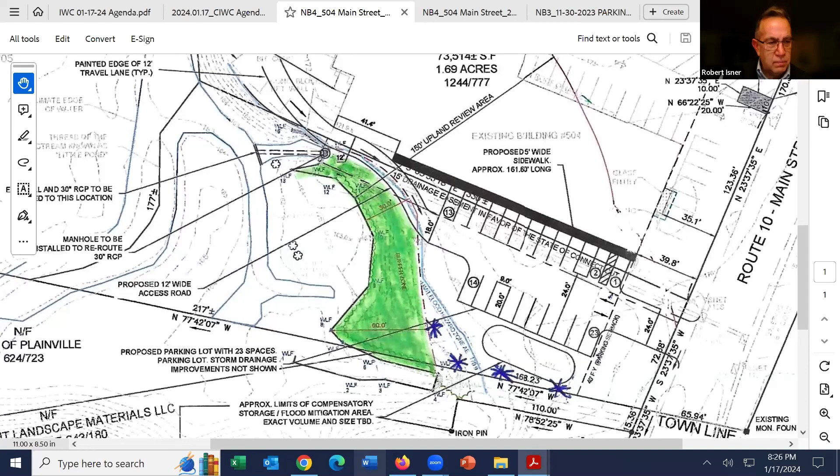Bruce, if I can - are there any unanswered or unaddressed issues that anyone from the town staff has had on this? Or are you all satisfied in town hall? At this point, I think we are, like I said, that's what I was looking for.

For some reason, I'm not sure why the second page is not here. I know that Val had sent us a separate one, but when he resubmitted this new drawing with these on and off, I think we only got the one page. So it is what it is - I can resend it to you tonight. It's the duplicate planting plan that Ian Cole had put together.

So it was a much smaller restoration area - more or less just double that planting area is what it is. So I think you guys have all that stuff, but I can resend it to you again. And like you said, Commissioner, if you want everyone to get an understanding of what's going on, you can look at this again, review it a little more, and then address it at the next meeting. Because the applicant's not going to be putting any trees in here tomorrow.

Yeah, I would - go ahead. Sorry, I would kind of agree with that, Bruce, that we perhaps table this for tonight and we can get that additional information and take it up at the next meeting.

I would like to state that I have a pending issue with the town with the fine issue here that's going every day. We've forwarded this from the last meeting that I thought we were going to come to a decision here today. The fine, it's just keep going. It's getting to the point where it's not even feasible anymore.

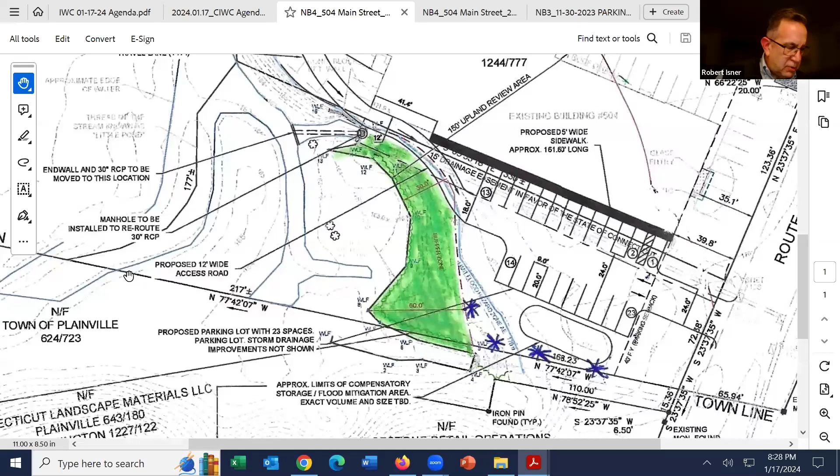I don't know what else to do here. But once again, okay, I guess it's up to you guys. So that's what we're gonna do. Bruce, do we have the ability to pause the fines, or do we need to take action for that to occur? I think definitely we will take that into advisement, and I would not have a problem with pausing fines at this point while the plan has been submitted and we're going through it.

Is it an option to take a vote tonight? Is that even an option to end this? Technically the fines lie with the town planning, with the town planner. The Inland Wetlands Commission can make a recommendation. But like I said, at this point, I can't see why we would not pause the fines while the plan is being reviewed.

So the fines were in place because we received a vague plan. The commission had sent back comments and we didn't get a plan for like a month and a half, whatever it was. So we sent out revised fines saying this project isn't going anywhere. So now that you've got the plan, the commission wants to look at it. I don't see a problem with pausing the fines.

The fine started when we were waiting for the soil scientist. That's when I think the second time he didn't come back right away. That's when the fine started. Well, the fines actually started upon the commencement of the cease and desist and 10 days after. That's when the fines had started. Okay, if that's what you're saying.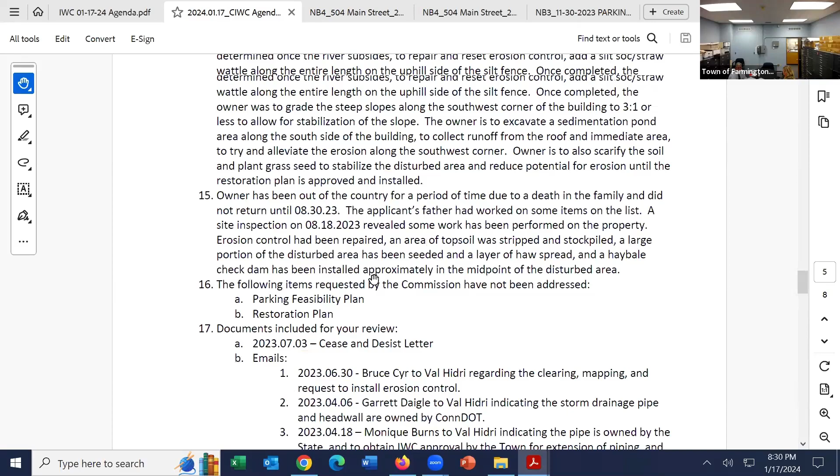I think I have it broken up in here. Where is it here? Fines. So citations, the initial one was on August, or sorry, yes, September 8th. That's when, and the last thing done by Ian Cole was in August.

And then so we had sent out, when does it say? And then we were waiting for a parking plan. That's when the fine started. Exactly, and then I submitted one, wasn't sufficient, submitted another one, and this is the third one, doubling the buffer zone. Cease and desist was started on July 3rd. So the cease and desist started on July 3rd.

Again, there was a lot of pause there, but we started the fines on the 8th of September, and they've been going on since that time. So Bruce, on the 8th of September, it says 1 day at $250 a day. Yep, so we send out an initial fine. Here you go, this is your gotcha fine for one day, and now the fines will continue on a daily basis. That's how that usually works.

Okay, so it's 98 days through December 15th. Exactly, so okay, that was the last fines that we had sent out. Then we received this plan within the last week and a half, week or so. So now we're moving ahead. So like I said, we have not sent out a fine letter from after December 15th, so okay.

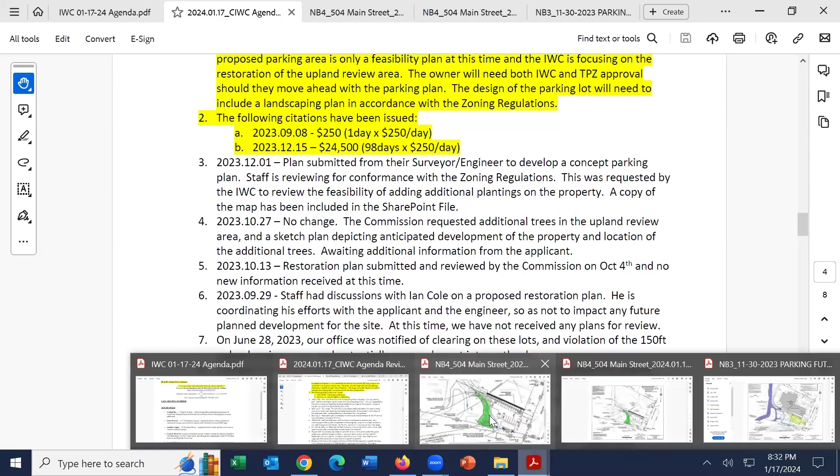All those in favor? Aye. Opposed? Abstentions? Okay.

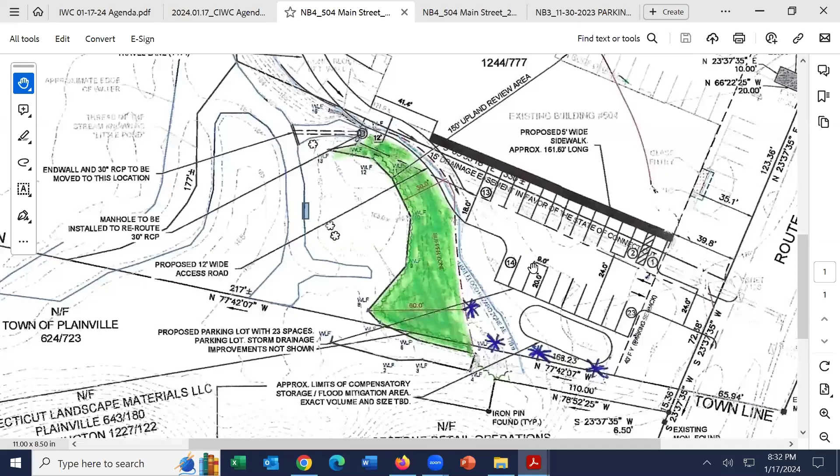Are we clear as to what we need for the next meeting? I think all we have to do is grab that plan he sent. For some reason it's not on this revised plan with the trees on it, so I'll make sure I send you guys the right one. I think you have the original plan with the plant list. I'll double check and resend it to everybody, so at this point you guys can review what he's done and we can talk about it in full at the next meeting.

If there's something else somebody wants now, let's bring it up and make sure it gets addressed between now and then if possible. When we had the other cease and desist off Apple Tree, we had a very detailed plan showing where all the trees and plantings were going. I don't know that we need that here, but if we can decide tonight so we don't have to go through this another meeting and ask for more information. So I guess that's a question for my fellow commissioners: do we need a precise layout of where all the plantings are going to go?

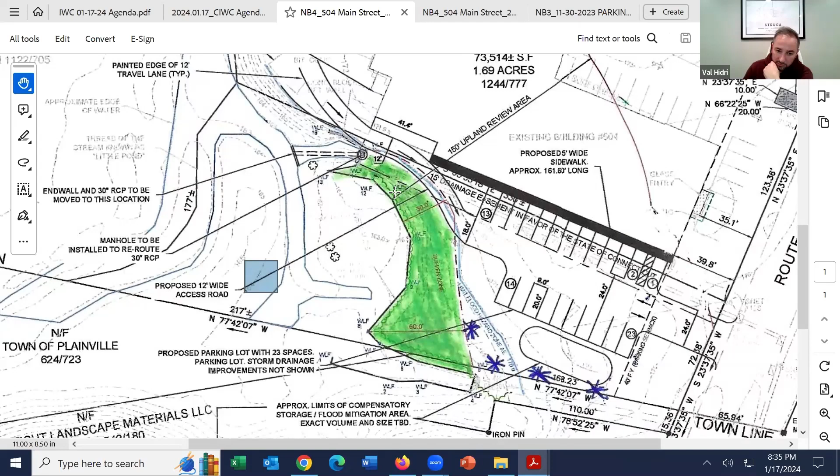It's not just an average Joe or me doing it. Understood, but they don't have the wetland know-how. So that's why usually in past projects the wetland scientists would walk it and coordinate together to make sure the appropriate plant is put in the appropriate spot.

I understand, it's just for me to do that I'd have to hire him again, and I've already spent over $25,000 just on engineering and wetland scientists to do this so far. And that's already come to a cost I can't bear anymore - I'm just trying to be realistic here. That's not even including the jobs that need to be done, and I just want to make that clear.

Also bear in mind, I do not own this property still - this is all something I do not own. But I'm willing to go for it and do this just to please the commission and get this done.

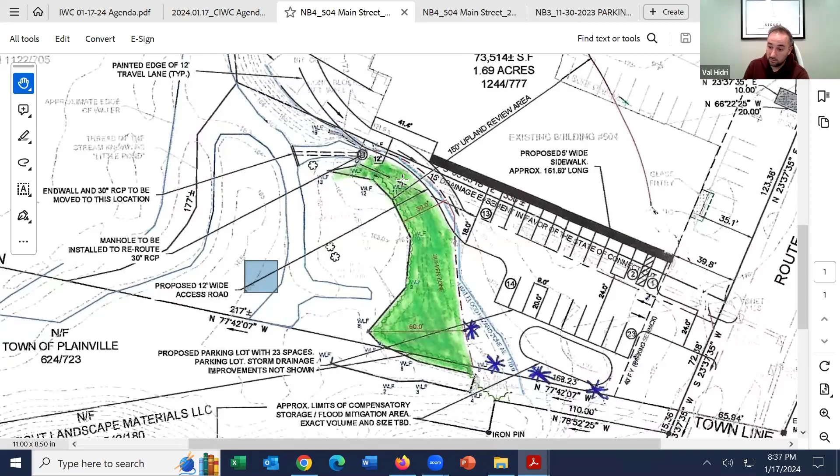Okay. Bruce, is there anything else we need to do tonight for this application? No, at this point if everyone's comfortable with whatever plan, I'll resend that again - you guys can look at it, make sure you have the plant list, look through it, see what you feel. If there's any comments, we can address them at the meeting on the 7th of February.

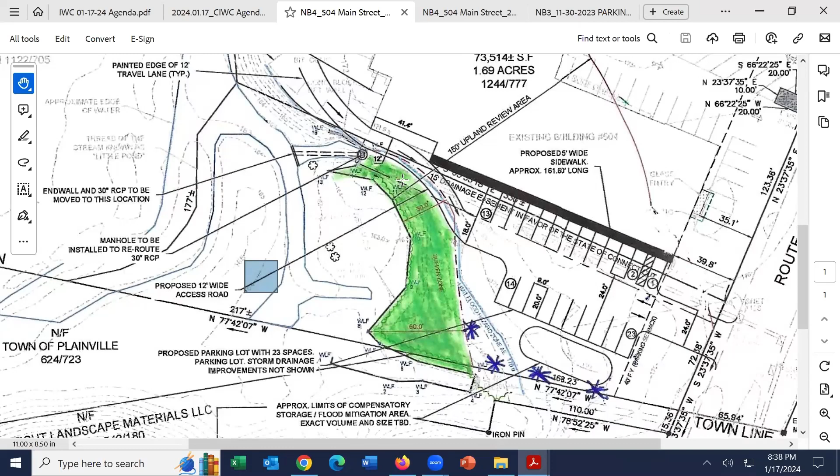If in the meantime someone sees something grossly off or wrong and wants to send me an email, I'll definitely look at it - I could chat with the owner in the meantime. Okay, thank you very much. All right, Val, thank you.

I also had included 1509, the cease and desist for that one, across from the town hall, on this one as well. Have not heard from the applicant. Sent a couple emails, sent them an invite, wanting to let them know that we're still having the meetings, they're still on the agenda, and still open for discussion. I have not heard back from him, and he's not logged in tonight.

So I was down there and took some pictures and added that to your agenda review during the high storm we had with the snow melt. It was like 3 inches of rain and 3 inches of snow melt. You could see with the pictures and video that large sections of the river are under, most of the area that he did is underwater.

So I think those are on the website, right? Right, Sandy? I think we added those on the website. Give me a second here. Yeah, but now they came up in the GIS. This thing is in the way here. Yeah, it's a pain like this. Did everybody see those?

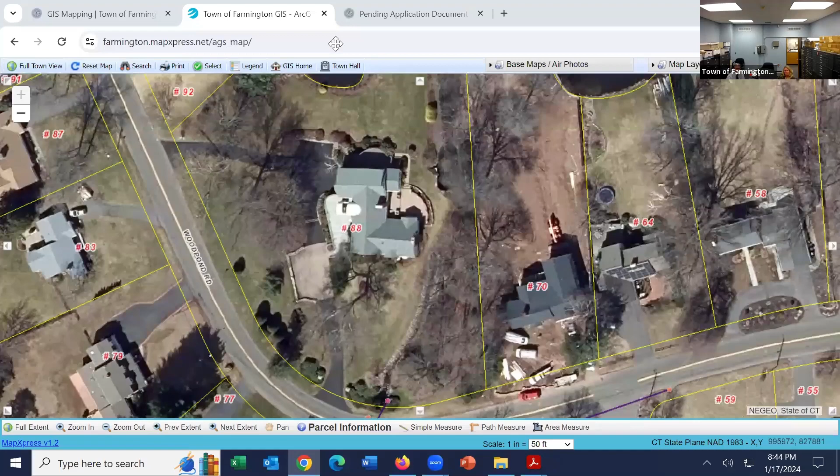Let me jump out, it'll be easier to start with the GIS. We had taken the application, they had actually submitted an application, you guys approved it. During the engineering, further final design engineering review, getting ready to bid the project, they determined it was in the best interest to look at this box culvert here. So just to get your bearings straight, we've got Burlington Road, we've got River Road, and we've got Lake Garda. The overflow from Lake Garda comes through a box culvert, down through here, and flows through this wetlands, through Bridgehampton.

If you're familiar with that subdivision, all the way down into the Farmington River at that point. So let me go back to this drawing here.

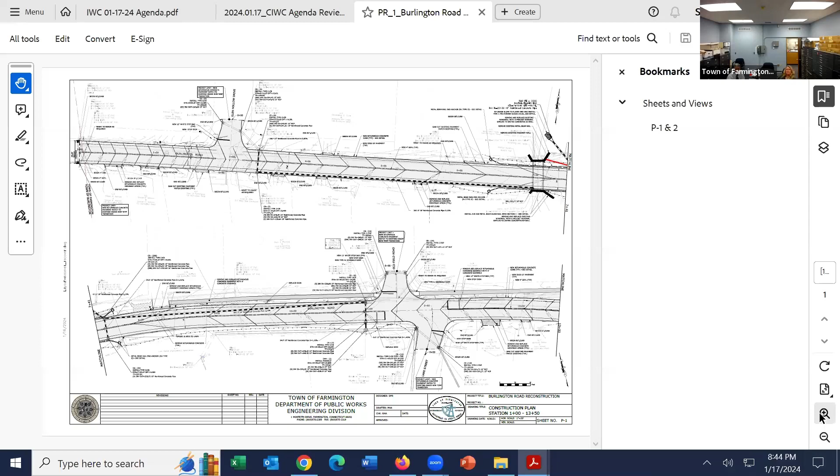So as part of this, they gave us a new version of Adobe right before the meeting, so I'm trying to learn this. Bear with me if you don't mind, some of these windows I can't get to close. I'm really frustrated here, but my Adobe updated too, and I hate it. So I'm trying to figure out how to close some of this stuff.

But here's the box culvert here. The red shows the existing pipe, and that existing pipe runs through the wall. So the intention was to replace this pipe, rebuild, not even touch the wall, but demo the pipe in the wall and just replace it. Looking at this wall, they felt it may be better to replace this wall in full. As part of all this construction, they're going to need to relocate this storm drain around the wall because of the guy wire and the pole that's here. So it would be installing this new retaining wall, or new wing wall here and here, and then piping this storm drainage outlet further down away from this wall itself.

So the question in front of the commission at this point is, how do we want to proceed with this? Do we feel this is a minor change and just approve it tonight, or does the commission wish to see a new full application submitted for this? At this point, I'll leave it up to you guys.

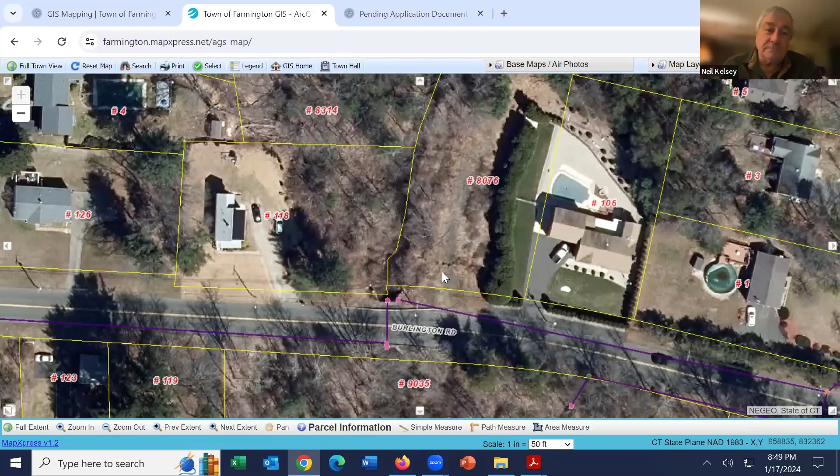Okay, given all that, I think this is a minor change, just part of the normal process where things in plans may not work out the way you think they are, and there's a better solution. I don't know if it's significant.

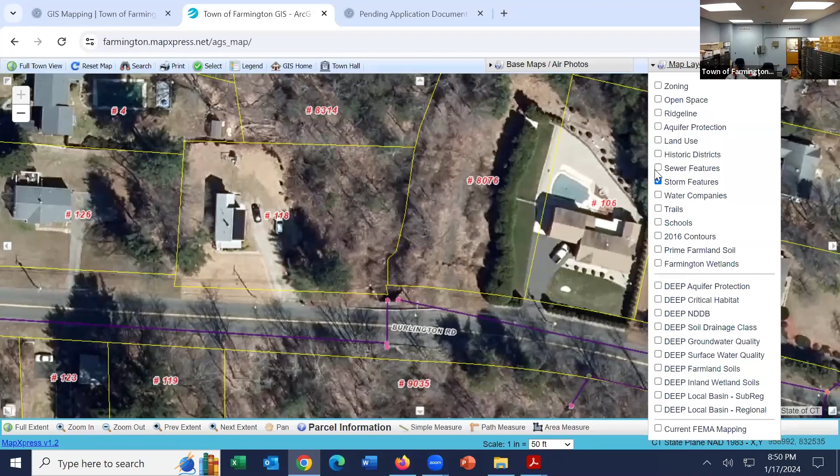Yeah, I would agree that this is not so significant, but I'm questioning where that outlet is shown. Is that on the private property, or is that still within the street right of way? That's all town property, within the town property here. This is the actual gravel road that the sewer line runs, where our main trunk line for Lake Garda empties out and collects and runs through. So this area is already a large disturbed area.

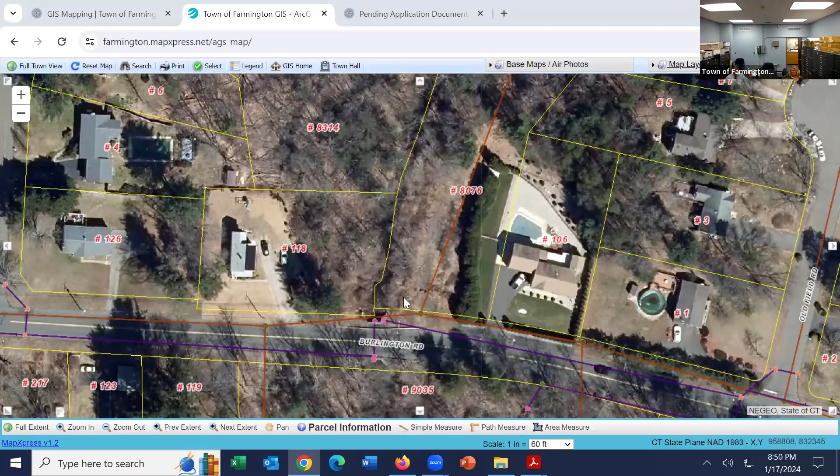You can see there's a lot of invasives in here on street view. So there really isn't a lot of value in plantings there because it's already disturbed from the town clearing this area for the sewer access, as well as some recent clearing for the utility pole. It's pretty much all disturbed.

While you're doing that, I'll pull it up quick. Anyone else have any questions or comments?

Bruce said, I think it's a minor change, and the technical details can get worked out between Dylan, Bruce, and the other staff.

There's the sewer right of way through there. Here's the box culvert, there's the pole. So the storm line will be going through here. As you can see, it's pretty well covered with invasive materials through there. It's already been cut for utility poles and all kinds of disturbance along here.

Bruce, do we need to make a motion on this? Yeah, I'd like to have that, so we have it official that you've reviewed this revised plan and feel that it was a minor, insignificant change, and staff and the commission approve it as presented. That way we can close this out and file it with the permit.

So moved by Robert. Do we have a second? Second, Mark. Any further discussion? All those in favor? Aye, aye, aye. Opposed? Abstentions?